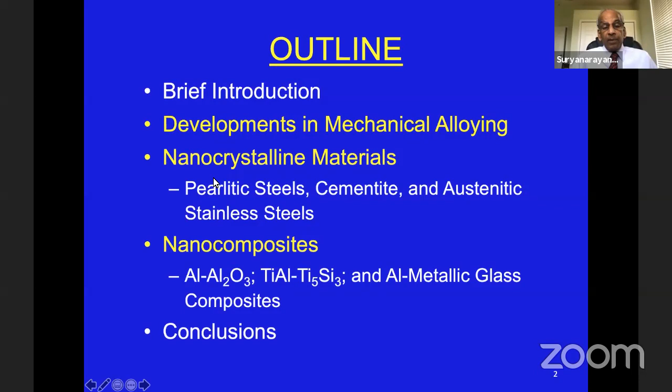The last topic listed in the program was the pathways in phase selection, which I will cover in developments in mechanical alloying itself. Now the first part will basically be the developments in mechanical alloying. And I'm sure most of the people attending this conference know what mechanical alloying is.

But I would like to define mechanical alloying as a powder processing technique that involves repeated cold welding, fracturing, and rewelding of powder particles in a high energy ball mill. That means basically we use a high energy ball mill, and when we put the powders and the grinding media together, the repeated operations of cold welding, fracturing, and rewelding eventually form an alloy. And because this is done under a mechanical force, this is called mechanical alloying.

The potential of this technique of mechanical alloying—from now onwards I would like to abbreviate this as MA, mechanical alloying—you can synthesize a variety of alloys, and all this synthesis takes place at very low temperatures, in fact most of the time at room temperature, whereas traditional alloying requires melting, which requires very high temperatures, and there's no such requirement here.

You can also choose what constitution, that means what type of phases do you want? Do you want solid solutions, metallic glasses, or intermetallics, quasi-crystalline, nanocrystalline? You can choose. That's where the pathways to phase selection also comes in. Sometimes, because of the difficulty in melting and alloying together in the liquid state, metals that are difficult to alloy can also be combined using MA.

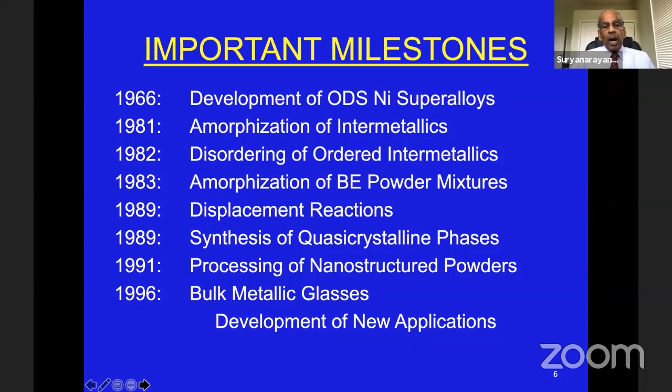There are many applications already existing, but more and more are coming up in the years to come.

Another technique that was very popular around the same time was called RSP, Rapid Solidification Processing. Mechanical alloying and RSP are both non-equilibrium processing methods, meaning that by subjecting materials to either process, you produce a variety of metastable phases and can change the microstructural conditions—instead of crystalline, you can make it amorphous, nanocrystalline, quasi-crystalline, or many other combinations.

The attributes of both RSP and MA are very similar, but an important difference is that RSP requires the alloy to be melted and then solidified very rapidly—that's why it's called rapid solidification processing. If solidification is involved, the phase diagrams determine what type of phases are produced. Although metastable phases are produced which aren't part of the phase diagrams, the phase diagram still imposes some restrictions on the type of phases that could be produced.

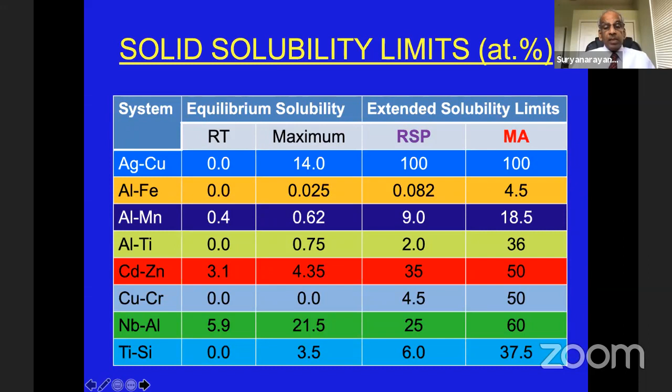Now, if you plot the atomic radius on the y-axis against the solute content, looking at copper as the solvent, plus or minus 15% are the limits suggested by Hume-Rothery. This is plus 15% of the atomic size, and this is minus 15% of the atomic size.

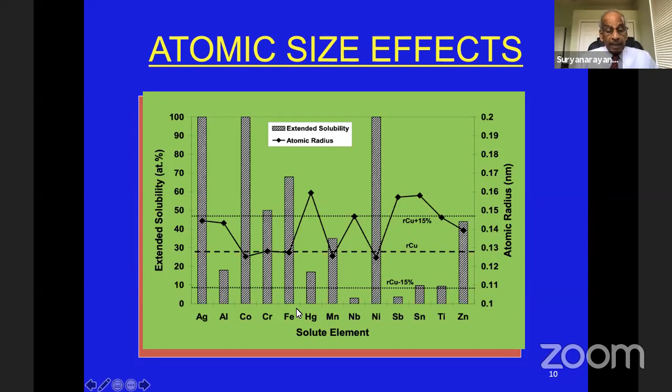That's the reason why, if you want to determine what factors are responsible for determining the grain size, there are two things: one is defect creation. If you create more defects, it's possible to decrease the grain size. But recovery also takes place because of heat effects, and therefore the grain size increases. The balance between defect creation and recovery determines what the final grain size is.

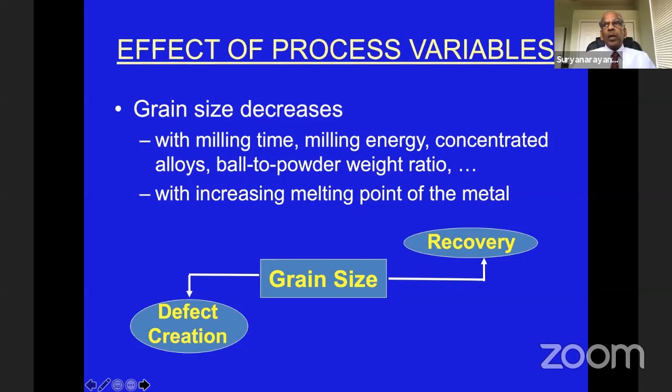To put it very succinctly, the grain size decreases with increasing milling time, with increasing milling energy, with increasing solute concentration, with high ball-to-powder weight ratio, and with increasing melting point of the metal. So you can determine what are the more important factors for your investigation.

Metallic glasses are also formed by these techniques, both RSP and MA. Just like in the solid solution cases, by mechanical alloying you're able to increase the glass forming composition ranges - more than what is possible by rapid solidification processes. It's a very similar technique, but essentially MA seems to be more effective, because the amount of departure you can achieve by mechanical alloying is more than what is possible by RSP methods.

Now, these nanocrystalline materials sometimes become very difficult to consolidate, and this is the way you can think of a consolidation rate or densification rate equation, where there are two very important things: one is the bulk diffusivity, and the second is the grain size.

This represents the densification rate. So if D decreases, the densification rate increases, or if the diffusivity of either the volume or the grain boundary increase, this densification rate also increases.

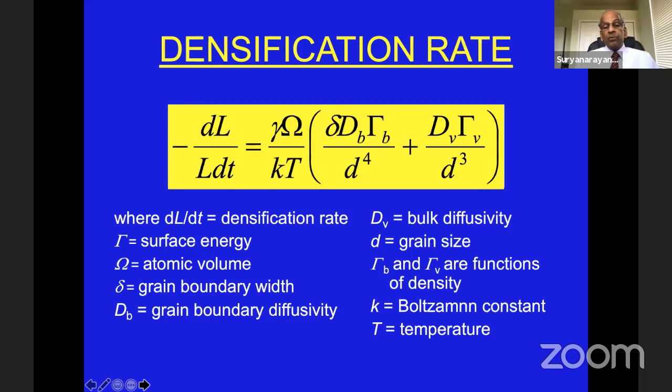But in the case of nanocrystalline materials, the diffusivity is higher, the grain size is smaller. As a result of this combination, the densification or consolidation of nanocrystalline materials is very easy, and that is an advantage for nanocrystalline materials.

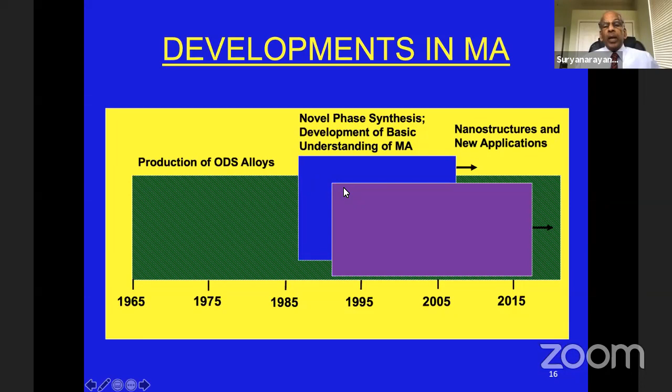To conclude this part of the lecture, the developments in mechanical alloying started in 1966 with the production of oxide dispersion superalloys. But by about 1986, people tried to produce amorphous alloys, solid solutions, or develop the basic understanding of why these processes occur this way, and how you determine the type of phase that is produced. All the scientific basis for understanding mechanical alloying started developing in 1986, and it is still continuing. By 1991, nanostructures were produced, and this is continuing even now, with new applications being generated. These two aspects are continuing, but the ODS alloys, there isn't much going on, which is why I did not put an arrow here.

Now the conclusion of this part: it is a simple and economic materials processing technique. You can determine what phase you want and what phase proportions by optimizing the process parameters. Powder contamination could be an issue, but that can be minimized or completely avoided at some cost. You can design, synthesize, and produce a variety of advanced materials using this technique of mechanical alloying.

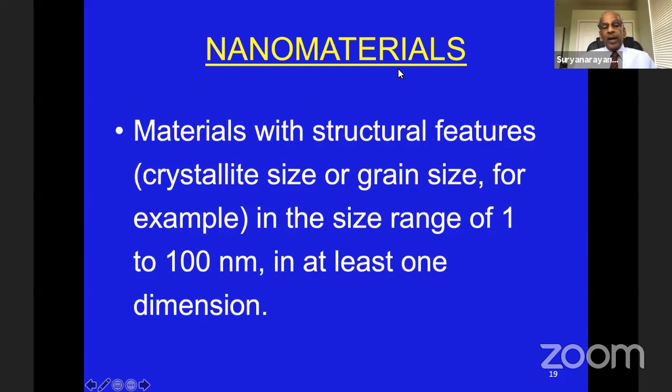Now I'm going to talk about nanocrystalline materials. This is something a lot of people know, probably everybody knows. A grain size of 1 to 100 nanometers will qualify a material to be called a nanomaterial.

But this nanomaterial is not really very new. People talk about the so-called Lycurgus cup, which is residing in the British Museum now, made with glass, done around the 4th century. You can see, if you put light outside this cup, that means in reflection, the glass color will be green. But if you put light inside the cup, that means you look at the transmission, then it turns red. The reason appears to be that when these cups were made, there were very small gold particles, approximately 70 nanometers in size.

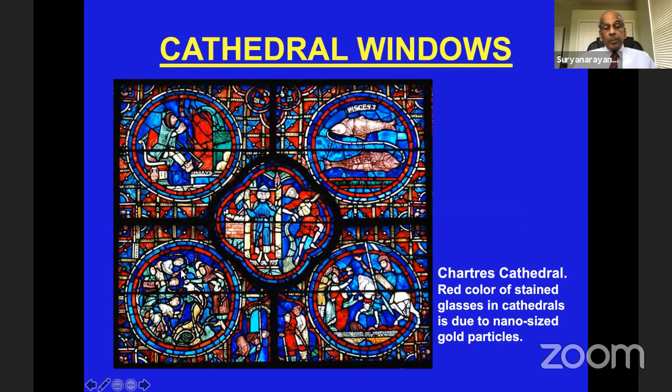Because of these small gold particles, the optical properties are different, both in reflection and in transmission. You can also see this in cathedrals in most parts of the world, again because of the nano-sized gold particles present in the glasses produced for these applications.

You can have new and improved properties and functionalities. Materials with grain size less than 30 nanometers behave completely differently, and therefore people feel there is unlimited potential for applications of these nanomaterials. You can have all these property changes as a function of the grain size.

If you take nanocrystalline materials, you can increase the ductility and toughness, but at the same time, you can also increase strength and hardness. Typically, in a coarse grained material, if strength is high, ductility is low, but in nanocrystalline materials, you can achieve both of them.

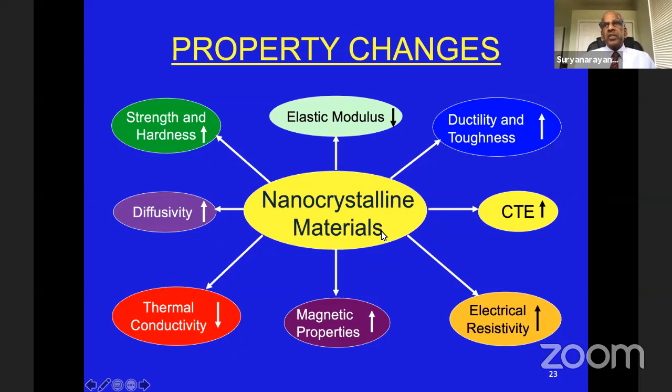Diffusivity is high, thermal conductivity is low, electrical resistivity is higher, magnetic properties are improved, coefficient of thermal expansion is higher, and modulus of elasticity decreases. Because of this interesting combination, a lot of new applications are being developed.

With this as the background, I would like to talk about nanostructured steels, focusing on three different aspects. One is the so-called pearlitic steels, that is iron containing about 0.8 weight% carbon. The second is pure cementite, iron containing 6.67 weight% carbon. The third is austenitic stainless steels, the so-called 18-8 stainless steels, iron with 18% chromium and typically 8% nickel. We wanted to see the effect of nickel content on the formation of these austenitic stainless steels in the mechanical alloying process.

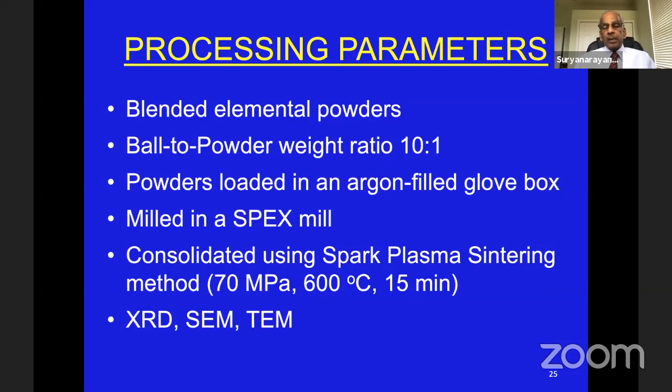All these are developed only during mechanical alloying, and my talk will cover only mechanical alloying, not the others. These are the process parameters. We started with a SPEX mill, using a very low ball to powder ratio, and then consolidated these materials using spark plasma sintering at a relatively low temperature of 600 degrees C, for just 15 minutes, using a relatively low pressure of 70 megapascals. But we were able to get complete densification.

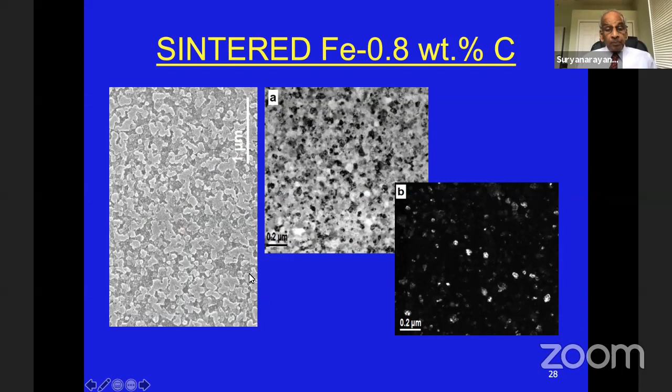The micron marker is 0.2 micron. This is only about less than 50 nanometers, even after consolidation. Now, if you look at the microstructure after annealing, that is after spark plasma sintering followed by annealing at 900 degrees for 1 hour, you still have the same phases, although the proportions are slightly different, but essentially the same two phases continue even after annealing.

Now you see the lamellar structure, the eutectoid lamellar structure, very clearly after annealing, because the very fine grain sizes would preclude the formation of this type of lamellar microstructure. That's the reason why only after annealing can you see this clearly in these TEM, transmission electron micrographs.

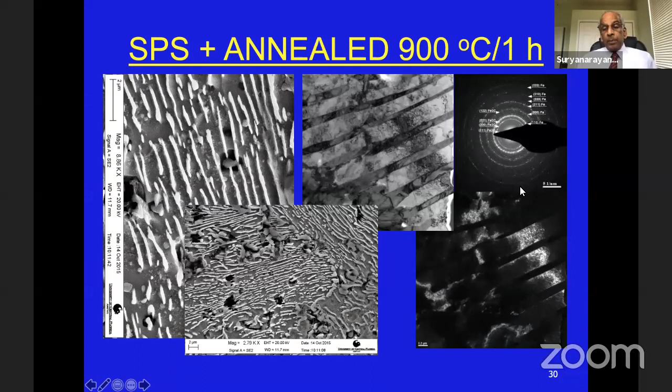These are the scanning electron micrographs. You can see the ferrite, cementite, ferrite, cementite, alternating lamellae, and then the diffraction pattern. If you look at the dark field picture, the white, highlighted portions represent the ferrite, because this is taken from one of the ferrite reflections. So you can produce these structures very uniformly using our technique.

Like that, there is variation - in other words, the uniform distribution of the two phases is not there, and therefore the properties also are not going to be uniform. But by our processing, by adjusting the process parameters, we're able to take care of all of these things.

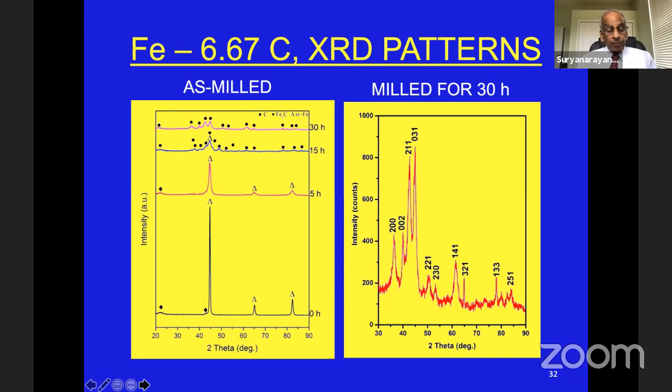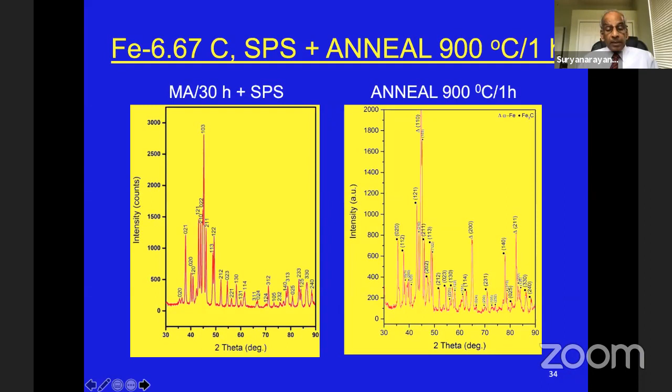But after SPS, if you anneal it also, again like in the previous case, you can get very sharp peaks. Because this is annealed at 900 degrees Celsius, some amount of alpha ferrite has also formed in this particular case. If you look at the microstructure, you will see the distribution of grains, which are larger than in the previous case, but the diffraction pattern indicates ferrite and cementite both present, though the amount of ferrite is relatively small in proportion.

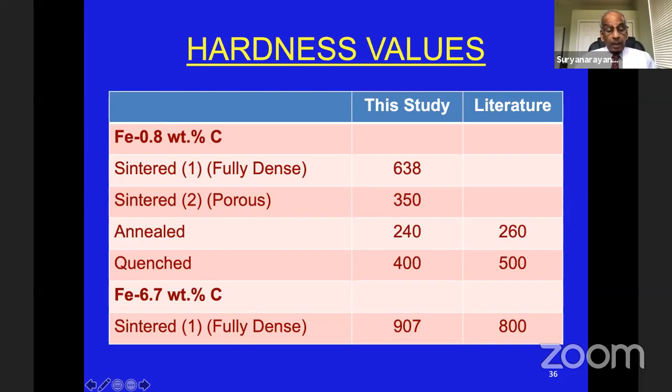I can measure the hardness values, and when I measure them, if it is fully dense, the perlitic steel has a hardness of 638 Vickers. And if it is cementite, 900 Vickers hardness number. By annealing and quenching, you can adjust the properties very easily. If you look at the hardness indentation of the cementite, you can see all these cracks indicating that the material is relatively brittle.

Now, if you look at the austenitic stainless steels, as I said, typically you see 18 chromium and 8 nickel. But we wanted to study the effect of nickel content.

If you look at the material milled for 30 hours, you can now see the 18-8, that means 18 chrome, 8 nickel - you can see both gamma and some alpha, that means the austenite phase plus some ferrite. Increase the nickel content to 12%, the amount of ferrite has decreased. Increase the nickel content to 20%, there is no ferrite present at all, pure austenite.

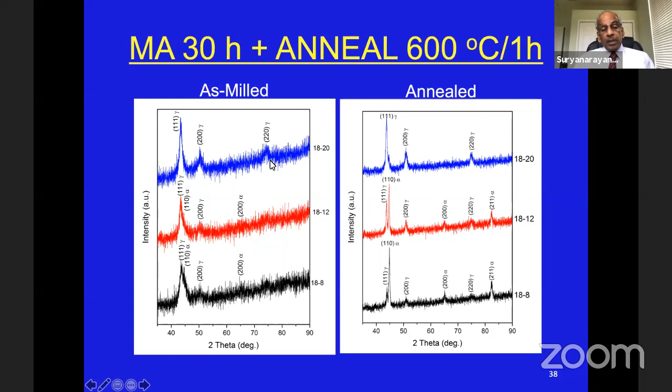Now, if we anneal this, obviously the patterns are going to be much more clear. Here again, you will see even after annealing you still have some ferrite in both 12 and 8% nickel, but at 20% nickel, obviously, because there is no ferrite here, here also you do not see any ferrite present at all.

So what we did was look at the electron microscopy results. You look at the grain size - this is 50 nanometers, and this is obviously less than about 10 nanometers. When you go to a higher resolution, you can find out what the actual situation is.

The diffraction patterns are different in different regions, and what you would notice is the presence of both alpha and gamma, that means ferrite and austenite. The same thing is seen in just one general area. But if you choose any one particular area and use this microbeam electron diffraction or nanobeam electron diffraction, you'll be able to get a better picture.

On the other hand, if you go to 20% nickel, everywhere you will see only austenite. That means the X-ray diffraction results are confirmed using this particular type of technique also.

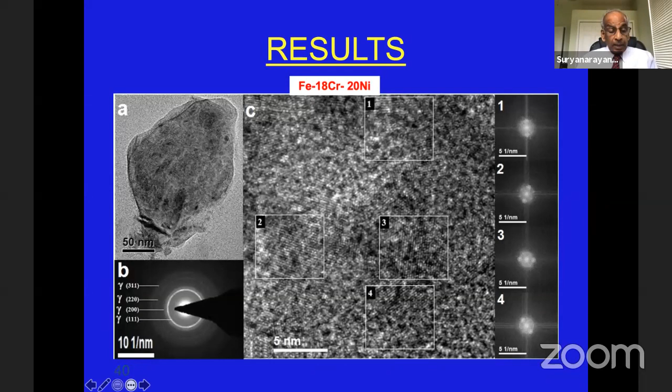So if you look at the constitution, now you will see 8%, 12%, 20% nickel - the amount of alpha and gamma is different, and the amount of gamma is increasing after annealing, although ferrite is still continuing to be present.

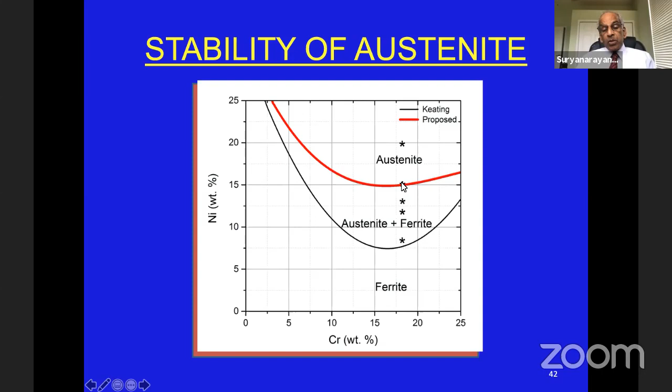Now I would like to focus on nanocomposites. This is the last part of my presentation.

Typically, when you have a particular reinforcement, that means in a composite, you have a matrix and a reinforcement. Depending upon the size of the reinforcement, the distance between two particles is going to be different. The larger the particle size, the larger is the spacing between particles.

Typically, when you do a very traditional composite, you can produce composites with a large volume fraction of reinforcement, maybe 30% or 50%. This is easy. But if you go to very small size reinforcement, 10 nanometers to 100 nanometers in that range, you can typically put only 2 to 5% of the reinforcement. More than that is difficult to mix thoroughly. But our goal is, can we increase it? Can we push this to 30% or 50%?

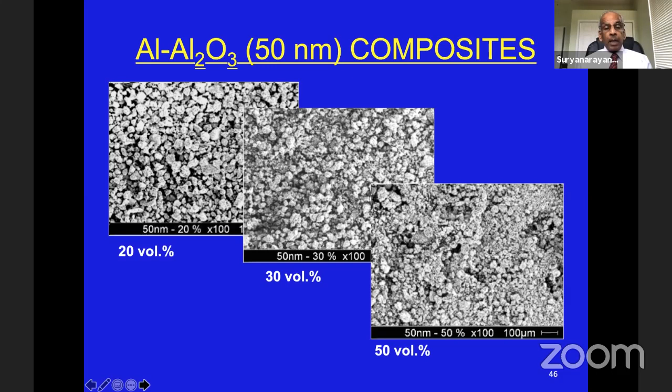So what we started with was the alumina system. The alumina particles are 50 nanometers. We said, let's take 20%, 30%, or 50% by volume of alumina and see whether we can distribute it uniformly by mechanical alloying. What we see is you can produce very uniform distribution of alumina in the aluminum matrix by increasing the milling time to approximately 20 to 24 hours. This is confirmed by EDS mapping technique, and I'm not going to show all those details here.

But what we would like to know is, how is the load bearing capacity of this particular material? So what we did was subject this material to neutron diffraction. When we subject it to neutron diffraction, you can record the neutron diffraction pattern, and at the same time, you can also apply a load.

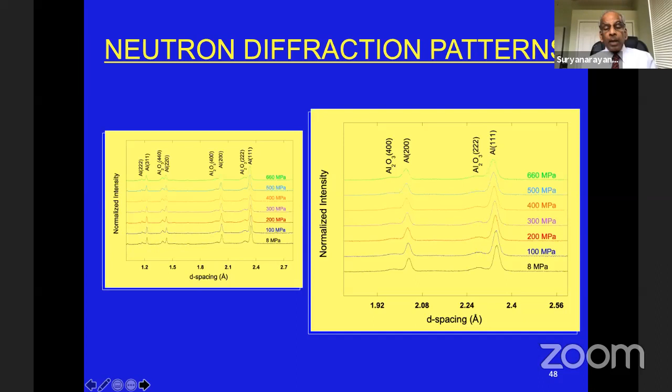So if you take any one particular peak and follow what the position of this peak is, that means the change in interplanar spacing as a function of stress, the change in interplanar spacing can be converted into the strain in the material, and you also know what the actual stress is. You can get a stress strain plot, and once you get that, you'll be able to determine the modulus of elasticity.

The second type of composite I would like to talk about is titanium aluminide containing 60 volume percent titanium silicide. This is a very high volume fraction of reinforcement in a titanium aluminide.

The reason we wanted to check this was titanium aluminide can be superplastically formed around 1300 degrees Celsius. But is it possible that we can reduce that temperature to lower values by having nanocrystalline or ultra fine grain size? So we took mixtures of titanium 48.9 aluminum, titanium 37.5 atom percent silicon, but we add extra silicon to produce this particular composition, which corresponds to 60 volume percent of the titanium silicide and 40 volume percent of the titanium aluminide. That means this is basically a titanium silicide based composite containing titanium aluminide.

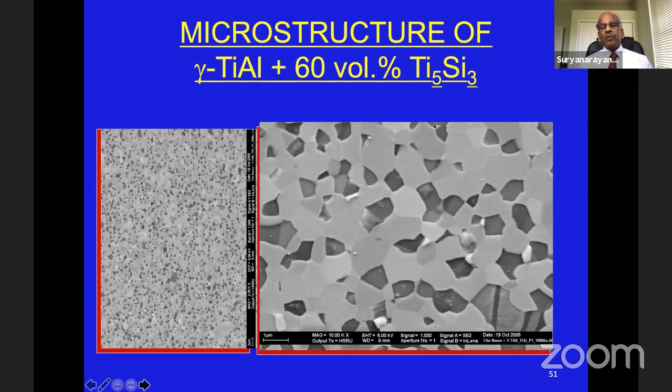Now, if you look at this, the microstructure is very, very fine. You can see both the titanium silicide and titanium aluminide are present. In the gamma titanium aluminide, you can see twinning present. The presence of these twins indicates that these are the titanium aluminide grains and the others are the titanium silicide grains. So it's like a very small grain size of both the matrix and the reinforcement, and both of them are uniformly distributed. This is the type of microstructure which is conducive to formation of superplasticity.

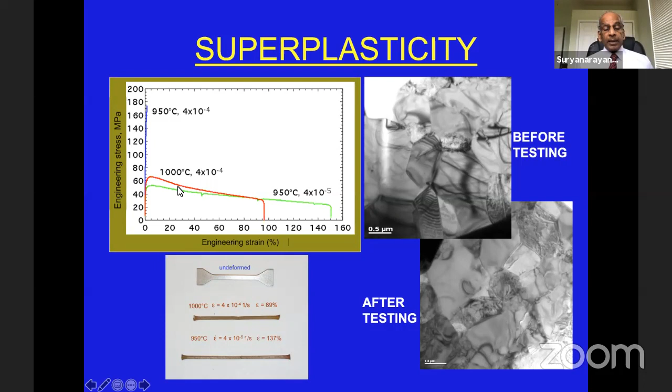And that's confirming that we are able to achieve superplasticity in this composite at a low temperature of 950 degrees at low strain rate. Or if you go to 1000, even at a higher strain rate, you'll be able to achieve this. Conventional coarse-grained materials will be having only this deformation occurring like this at 1300 degrees Celsius, which is too high.

Now, I wanted to talk about the last type of composite, which is very new, and that's the reason why I thought it's interesting to talk about it. So far, we talked about ceramic materials or intermetallics dispersed in a metallic matrix. But what will happen if I introduce a metallic glassy powder inside a metal?

So we took aluminum 7075 powder, added 0, 2, 6, and 8 volume percent of the titanium, copper, nickel, aluminum glassy powder, mechanically alloyed it, and then cold pressing at room temperature and then hot extrusion. Then you have all these different techniques to characterize this material.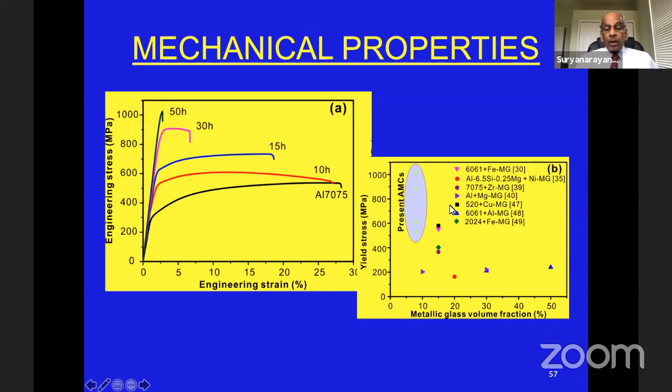And now, if you look at the comparison of the present aluminum matrix composites with the other types of composites, and if you plot yield stress versus metallic glass volume fraction, you're able to get a very high yield strength, even at a low volume fraction. Obviously, if you increase the volume fraction, this is going to be somewhere here even. And therefore, we have achieved the goal of increasing the strength.

But if you now come to 350 degrees Celsius, for example, the aluminum 70-75 is on the top. That means it has a higher strength than the composite. And that is something which is interesting. If you plot the ultimate flow stress as a function of the volume fraction of the reinforcement, you can see at different temperatures, there is a reversal that is taking place.

If you plot the stress as a function of temperature, there is a reversal taking place around 150 to 175 degrees Celsius. This is interesting because a composite is weaker than a monolithic material at higher temperatures.

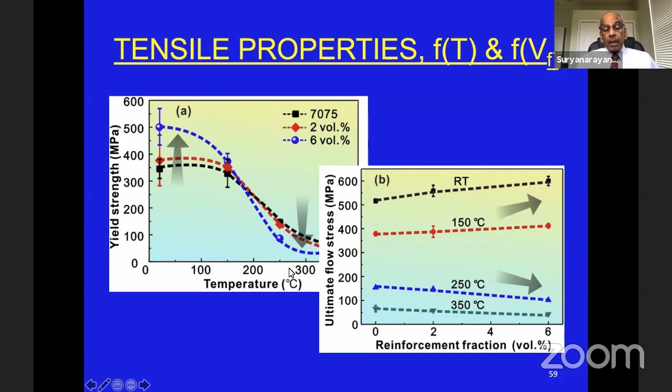So we looked at the possible reasons. Many different possible reasons are there. Thermal softening could be there, or damage accumulation could be there, or large reinforcements or medium-sized reinforcements. All these possibilities exist, but none of them seems to be present.

The more important thing, why we were able to get this particular situation, is because overaging of the matrix takes place, since aluminum 7075 is an age hardenable alloy. Overaging takes place because there is a lot of difference between the coefficient of thermal expansion of the reinforcement and the matrix, and that causes stresses. Those stresses cause generation of dislocations, which act as heterogeneous nucleation sites for the formation of a precipitate, and that accelerates the process, and that's why it is responsible.

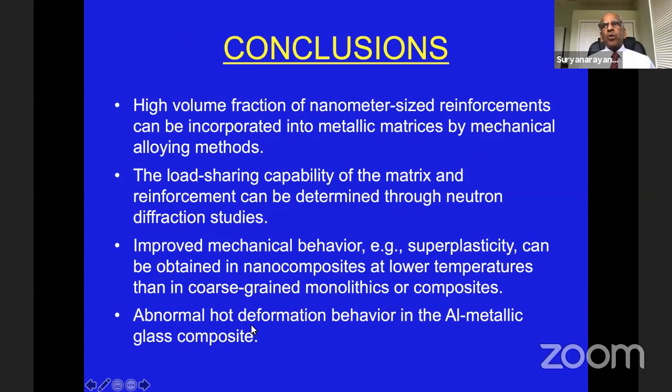So to conclude this nanocomposites area and high volume fraction composites in general, as I said, up to 60% we were able to achieve. The load sharing capability was determined using neutron diffraction studies. Mechanical behavior is in general improved. Superplasticity is observed, and very abnormal behavior, where the matrix seems stronger than the composite, is observed in some of these types of composites.

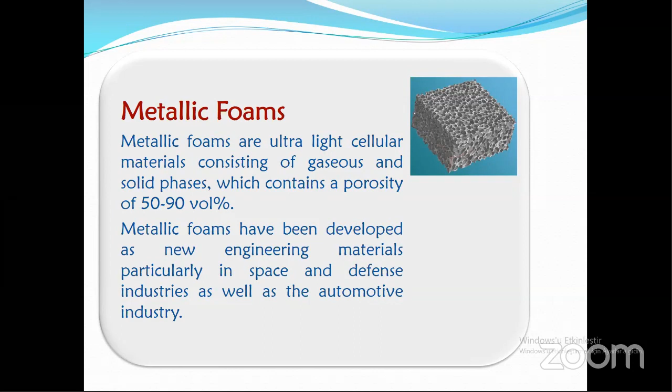Metallic foams have been developed as new engineering materials, particularly in space and defense industry, as well as automotive industry. These ultralight materials possess unique mechanical properties, such as high compression strength, stiffness, good damping, and high fire resistance properties, remarkable vibration attenuation, and high impact energy absorption at low weight.

Much attention is paid to controlling the morphology of the cell during the foaming process of the melt. Actually, there are lots of parameters that can be changed: foaming temperature, that is important, alloying elements, foaming duration, that's also one of the most important things. Another is the amount of reinforcing element. Now we will work on this today.

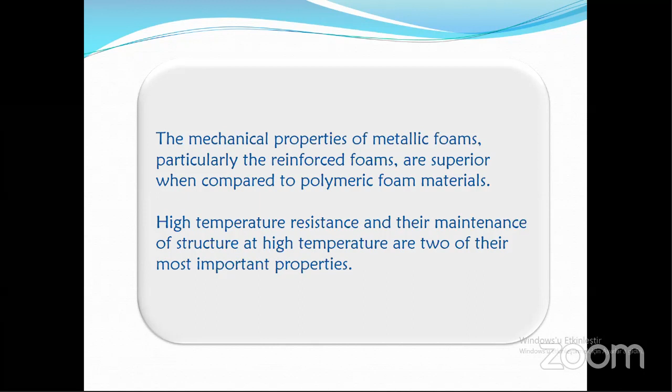The mechanical properties of metallic foams, particularly reinforced foams, are superior when compared to polymeric foam materials. High temperature resistance and their maintenance of structure at high temperature are two of their most important properties. There are two types of pore morphology, open and closed. We are dealing with closed pore morphology.

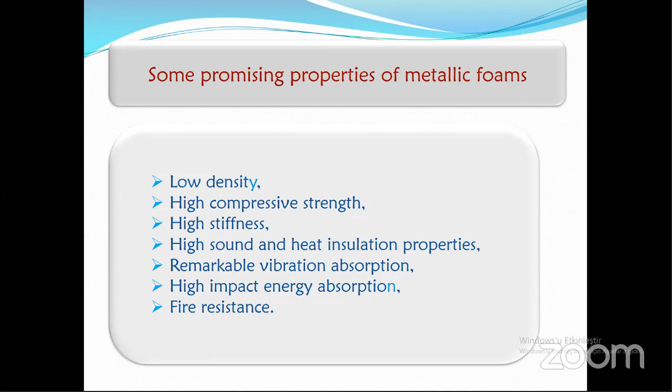Some promising properties of metallic foams are low density, which makes this material popular, and high compressive strength, another important property. High strength, high stiffness, high sound and heat insulation properties, remarkable vibration absorption, high impact energy absorption. Because of these properties, we are working on this material as an armor material. Fire resistance is also another important property of metallic foams.

Excellent properties make foam particularly attractive for the automotive industry. Some leading automotive companies are working hard to use metallic foams in appropriate parts of their vehicles, lifting and conveying systems, transport, ships, and aerospace applications, sound and heat barriers, and internal armor plates.

Actually, this is a new subject. I'm sure that we are one of the first scientists working on this subject.

The study of metallic foams, particularly aluminum ones, has become attractive to researchers interested in both scientific and industrial applications for more than a decade. Experimental studies have shown that almost all metals can be turned into foam. Aluminum, zinc, tin, lead, iron, nickel, brass, and their alloys can be produced by the powder metallurgy route. Nowadays, we are working with copper and even with gold.

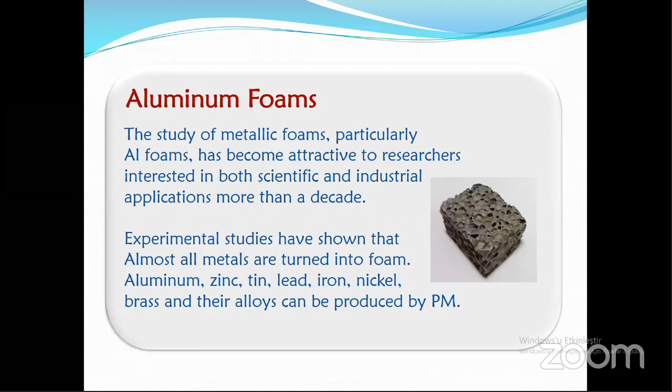When we look at the powder metallurgy route, the production of aluminum foams via this route is attractive due to the ability to produce near net shape components. This method involves mixing aluminum or aluminum alloy powder with a foaming agent, generally titanium hydride, and reinforcing elements such as silicon carbide, boron carbide, aluminum oxide, etc., followed by compaction such as hot pressing, cold pressing, extrusion, or combined methods.

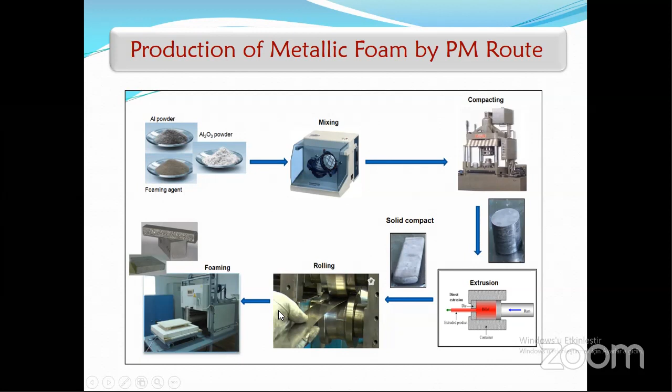Say we are producing aluminum powder, foaming agent, and some reinforcing elements such as alumina. We are mixing them, generally using a three-dimensional turbulent mixer, and then compacting to get green dense material. Since it contains lots of porosity and cracks, it is impossible to form them directly. That's why we are hot extruding that material to obtain a solid compact, then rolling, then foaming in a special furnace, and then we get the metallic foam.

Sometimes we are using a reinforcing element. In order to improve the stability of metallic foams, ceramic particles, mostly silica, alumina, or boron carbide, are commonly added. These ceramic particles are believed to inhibit melt flow by increasing the bulk viscosity, thereby decreasing the rate of cell coarsening and drainage of liquid throughout the cell structure. During the foaming process, these particles attach to the gas-liquid interface and modify its curvature, reducing the pressure difference between the Plateau border and the cell wall.

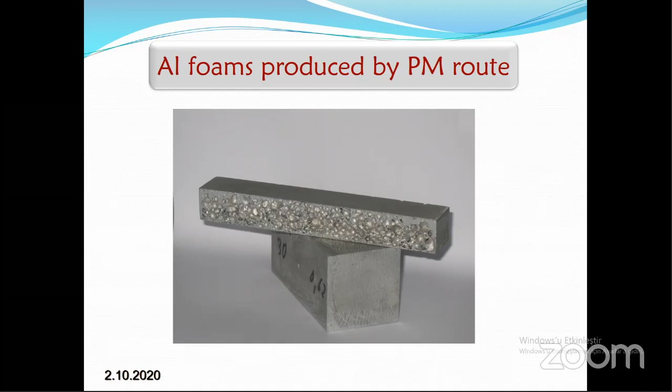These are aluminum foams produced by the powder metallurgy route. When you look at it from the outside, it looks like normal aluminum, but when you cut it, the cross-sectional area contains lots of porosity. It looks like a sponge. Because of this porous structure, it has very low density. That is important. This is the sample produced in our lab.

The density was about 0.6 gram per centimeter cube. A sample can float in water easily. That's why this material is very important.

When we look at the mechanical properties of samples, this is the tensile behavior of foam material and bulk material. Tensile properties of the foam material are not good because of lots of porosity in the sample, which acts as a notch effect. That's why it reduces the tensile properties of the samples. But the compressive strength of the sample is quite good.

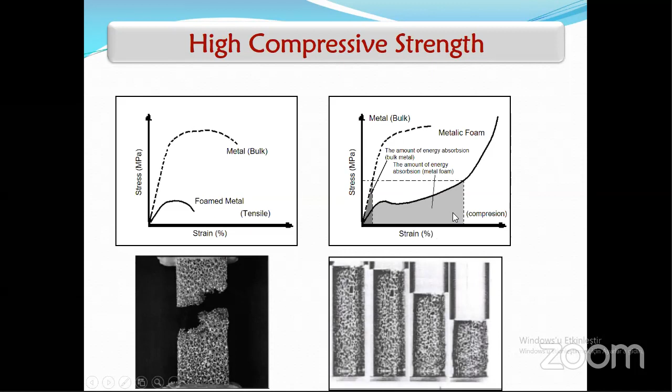That graph shows the bulk material compressive strength, that is, the metallic foam. The dark area here is the amount of energy absorption of the bulk material, which is the small area. This open gray, that big area, is the amount of energy absorption of the metallic foam. So we can say that the compressive strength of these materials is quite good.

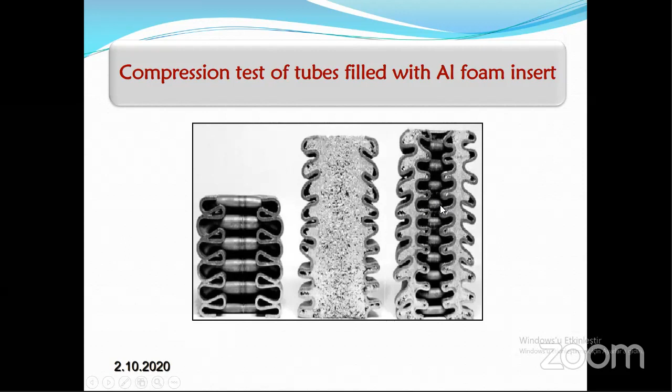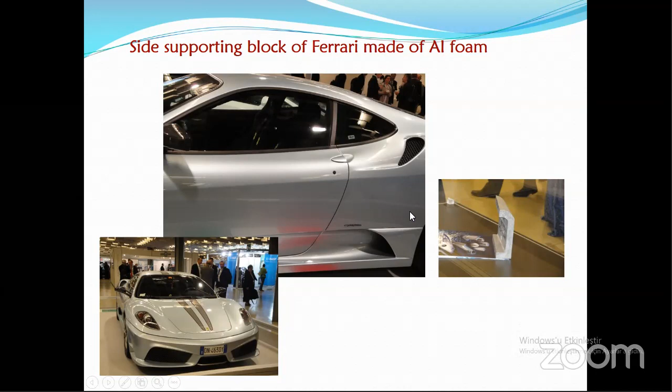This picture shows the possible usage of metallic foams for automotive frames. We can use metallic foam in some parts of this frame. Some leading car companies are working to support some parts of cars with aluminum or magnesium foams. This is the side supporting block of a Ferrari made of aluminum foam, shown on the right-hand side here. The aluminum foam is supported somewhere here. This was shown at a conference in Italy where I saw this Ferrari displayed.

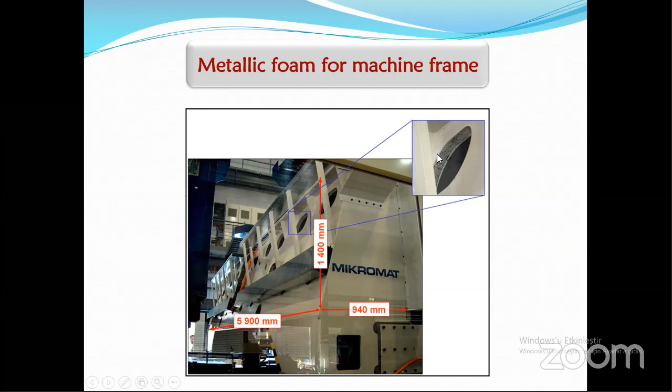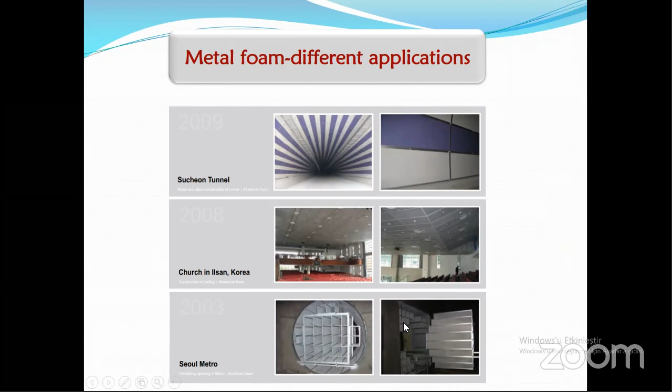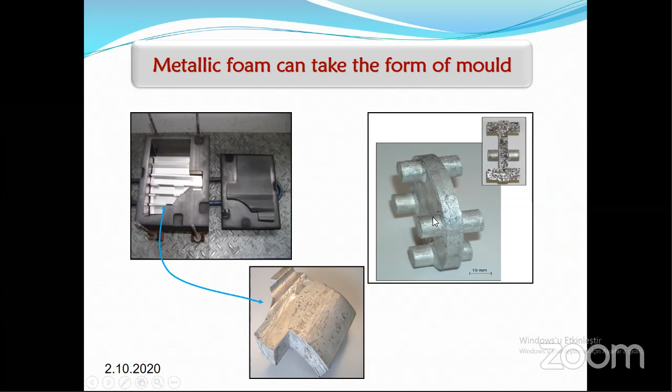How can we produce it? There are a number of production methods. This is the production of metallic foam from small precursor materials. We don't use these precursors so much, but this is just to show how metallic foam comes out, and this video is very good. When you heat the precursor foamable material, it starts foaming, and then sometimes you have to take it out. If you want to control the structure or the mechanical properties, you have to put a limiting plate somewhere here.

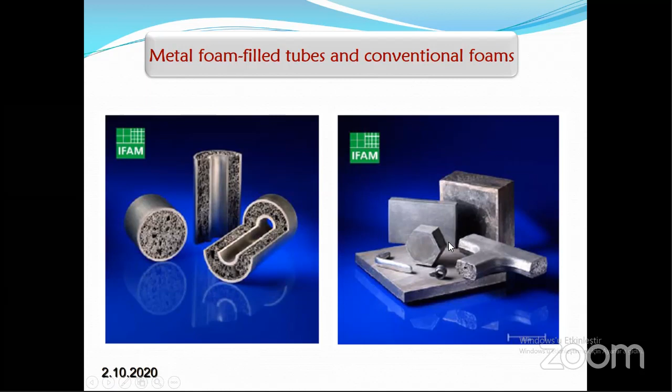This shows metal foam filled tubes, which are conventional foams produced at IFAM, the Fraunhofer Institute in Bremen. Sandwich foam and other types of metallic foam have the outside made of non-foamable materials, with foam inside.

A sandwich panel consisting of a metal foam core and two metal face sheets can be easily obtained by bonding the face sheet to a piece of foam with adhesive. Alternatively, foamable raw materials can be roll-cladded with metals, such as steel, aluminum, or titanium, by attaching each side to the foamable precursor before rolling. We are doing that one actually.

The conventional non-foamable layers need to have a significantly higher solidus temperature to avoid melting during foaming expansion, otherwise the cover layer also melts. This is the production of sandwich foam.

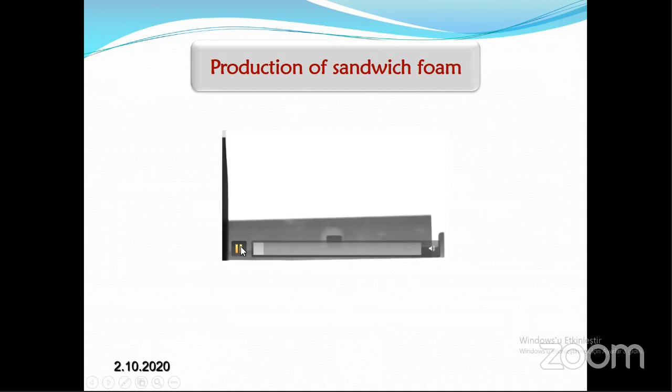That's also a good video. In both sides of the sandwich there is non-foamable metal, and the inside core is foamable material. When you heat it up, the foamable material starts foaming. Look, the outside stays intact, so you can stop whenever you want. If you want, you can go a little bit more and get sandwich foams. Both sides are non-foamable materials, and inside is the foamable precursor material.

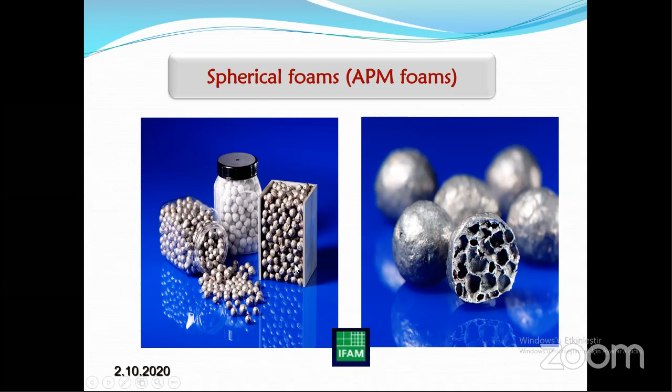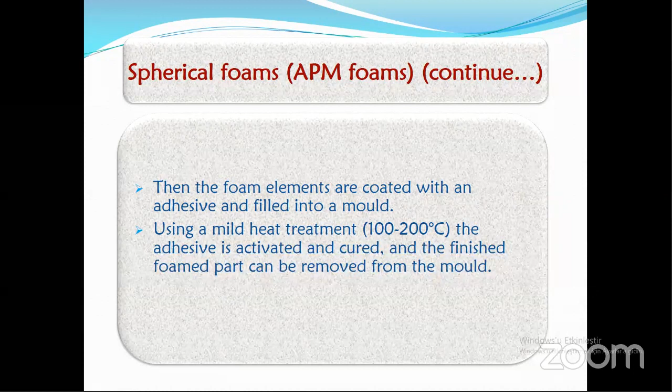Spherical foams, now called advanced pore morphology, are new. This process, a recent development of Fraunhofer IFAM in Bremen, uses a large number of granules made of a foamable precursor material. Generally, sheet materials are cut into rectangular shapes and continuously fed through a belt furnace to effect foaming. During foaming, they take spherical forms due to the surface tension of the materials. Then the foam elements are coated with an adhesive and filled into a mold. Using a mild heat treatment, the adhesive is activated and cured, and then the finished foam parts can be removed from the mold.

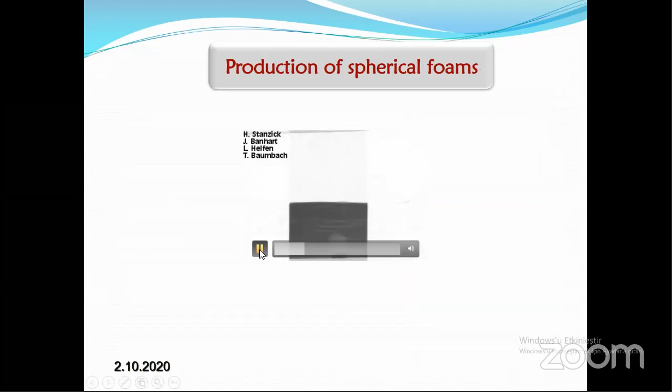You are cutting a rectangular shape foamable precursor. Because of surface tension, it turns into a spherical shape. If you have a very big material, the bottom side is a little bit flat, but nowadays we prepare a special mold for this, so we can get very nice, very spherical samples.

I will show some materials and experimental procedure about that. We work a lot actually, but I will give some information. We use aluminum powder and Alumix 231 powders from ECKA. For blowing agent, we use titanium hydride from Aldrich. For reinforcing elements, silicon carbide from Aldrich and boron carbide from Nurol, Turkey.

Compaction was 600 megapascal. Preheat treatment 550. Deformation rate 50 to 70%. Foaming temperature 690 to 710 centigrade.

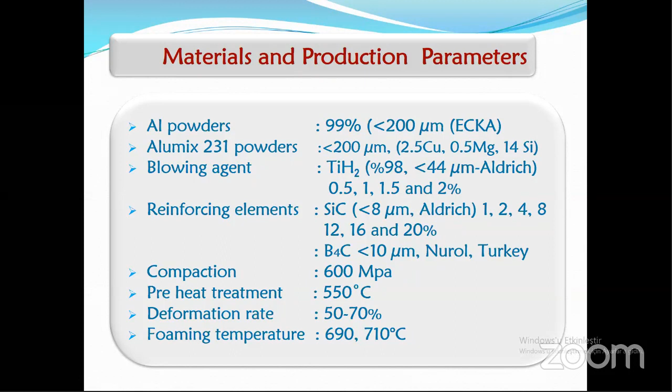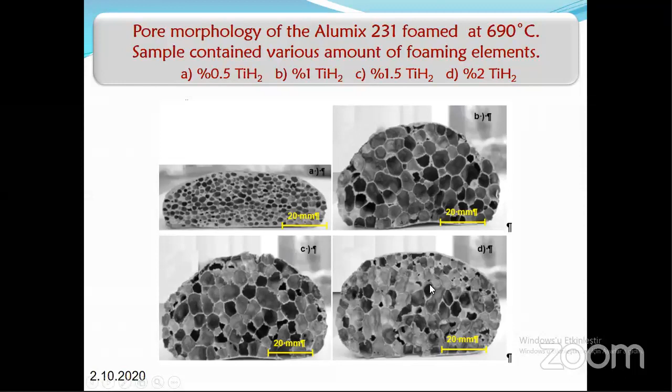When you go further, density is decreasing, but the mechanical properties also decrease.

This is pore morphology of Alumix 231 foam at 690. Again, samples contain various amounts of foaming elements: 0.5% titanium hydride, 1%, then 1.5% and 2%. Because of high temperature and high amount of foaming elements, some collapsing happened, and we took these samples out - they cannot be used.

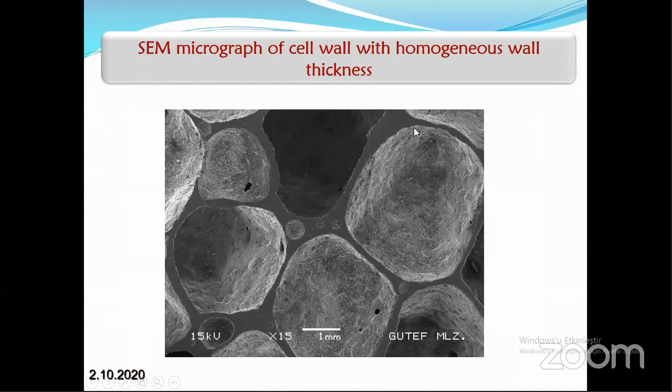Looking at the effect of foaming agent on the linear expansion rate of aluminum-based foam at 710: linear expansion rate of pure aluminum is just over 400%. But Alumix 231 goes almost 400 when they contain 0.5 and 1% titanium hydride, and then starts decreasing.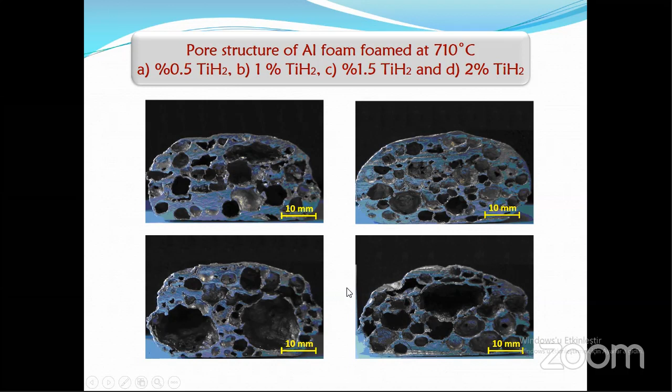This is the pore structure of aluminum foam at 710 with 0.5, 1, 1.5, and 2% reinforcing element. When we compare these materials with LMX231, pore structure is not good, but 0.5 and 1% is reasonable. After that, there's coarsening of the pore, which is why mechanical properties are also not good.

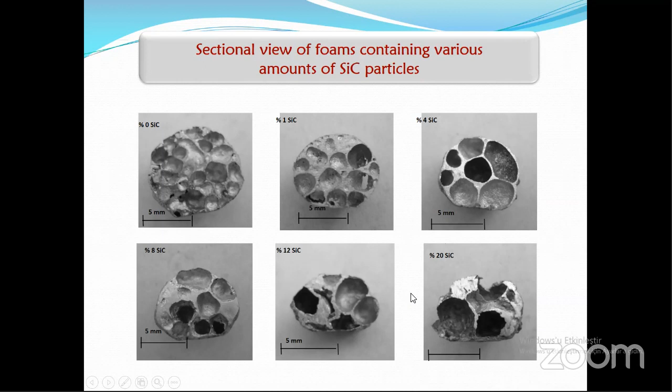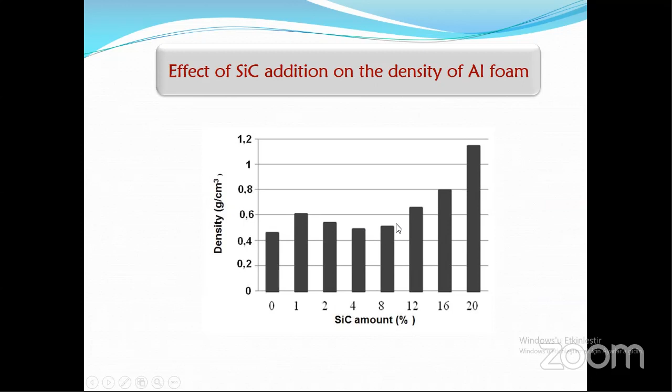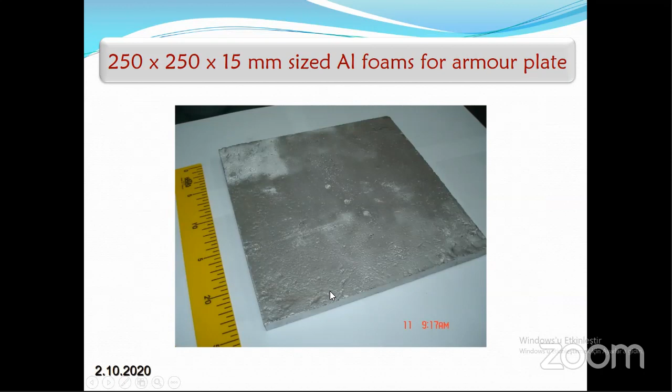This is the sandwich structure, and this is the cross-sectional area of the sandwich structure - that's quite good, actually. This is a very big sample, 250, with a thickness of 15 millimeters size, aluminum foam. This is for armor plate.

Aluminum foam reinforced armor plates, I would like to mention. Boron carbide reinforced aluminum-based metallic foam was produced and then used in sandwich structure of polymer-based armor plate in order to reduce the shock effect during explosion. This research was the desire of Turkish Armed Forces.

All ballistic tests were performed by them according to the relevant NATO STANAG standards. We are allowed to provide only a limited test result. This project was carried out by Gazi University, where I was working at that time. Izmir Institute of Technology and Baris Electric, we worked together.

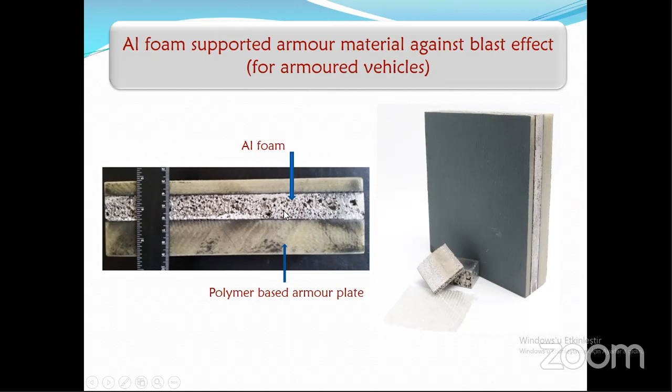Aluminum foam supported armor material against blast effect. This is the polymer-based armor plate normally used in some armored vehicles. Now we add some aluminum foam inside here, and then blast test was carried out on this sample.

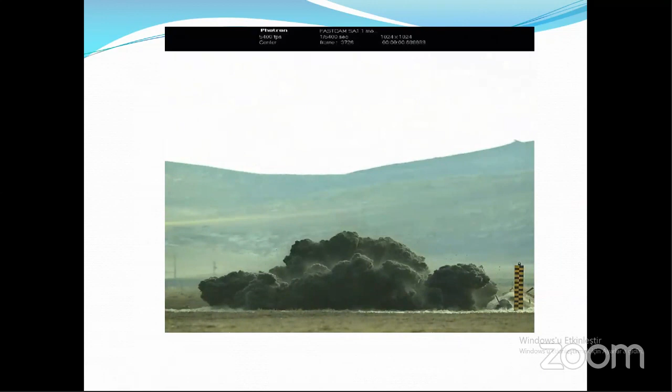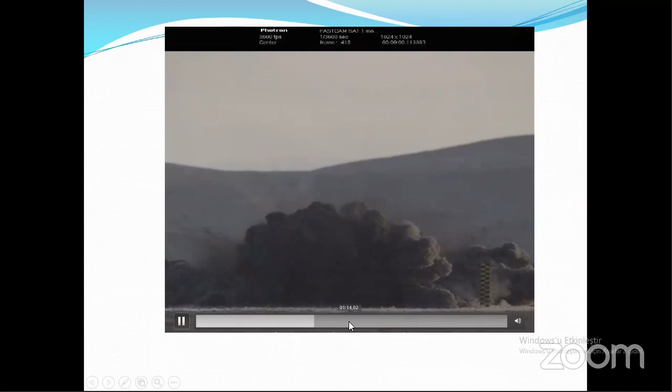This is the 10 kilogram TNT test. And then this group is 8 kilograms TNT. This one is a little bit low.

Now I want to show slow motion blast test of the sample. Several cameras were positioned in different locations, taking pictures and videos during this test.

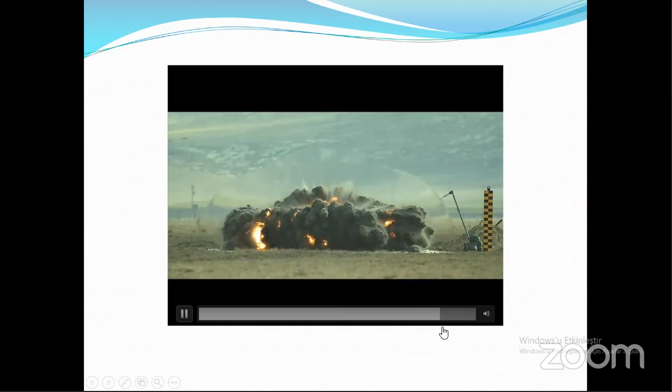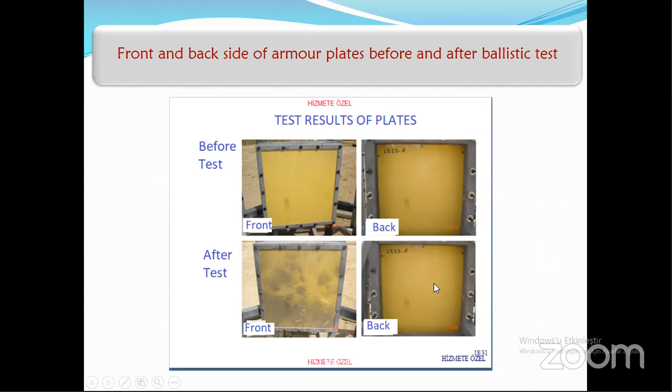Front and back side of armor plates, before and after ballistic test. That is before the test, front and back side of our armor plates. This is after the test - they are intact actually, no problem occurred here. I couldn't give some detailed information about that because I am not allowed.

Just in order to show the energy absorption capacity of aluminum foam, here is a last video taken from the Fraunhofer Institute while I was working there. This is normal metal, this is the metallic foam. Look - the steel ball first falls onto the steel plate. Okay, this is metallic foam, keeping very, very nice.

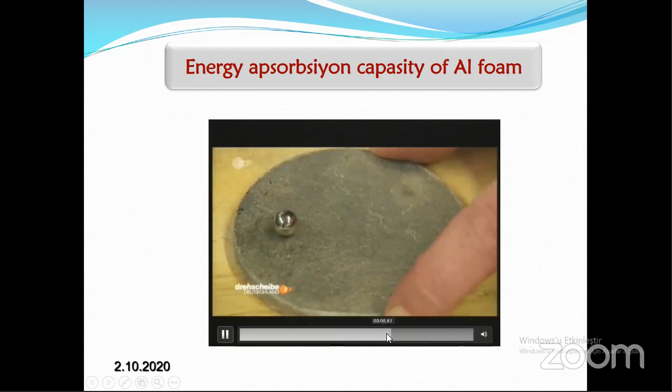As a conclusion, aluminum and Alumix 231 powders were foamed with various amounts of foaming agent at 690 and 710 centigrade degrees, and spherical foams with the addition of silicon carbide and boron carbide particles were formed at 690 degrees, and the test results are given below. The amount of foaming agent was found to be one of the important parameters for foaming, particularly for pore structure, linear expansion rate, and morphology of both pure aluminum and Alumix-231 foams.

1% titanium hydride was found to be the most suitable amount of foaming agent for foaming of both materials. For all conditions, foam produced from Alumix-231 powder exhibited more homogeneous pore structure compared to samples produced from pure aluminum powders. With high amount of foaming agent, results in a thinner cell wall, together with partial agglomeration of pores and finally collapsing of foams.

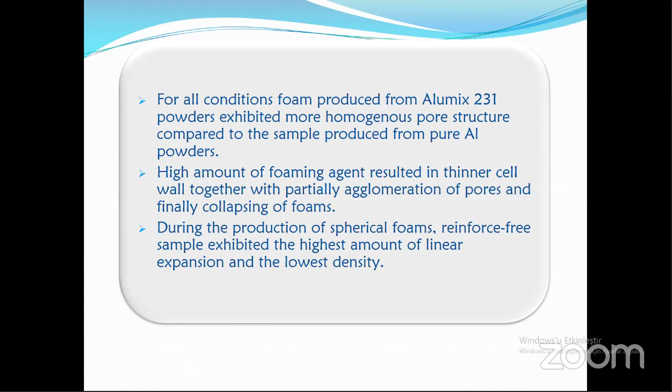During the production of spherical foams, the reinforce-free sample exhibited the highest amount of linear expansion and lowest density. On the spherical foam containing silicon carbide, the best result was obtained on the sample containing 4% silicon carbide particles. This sample exhibited more spherical structure, together with lower density, homogeneous pore structure and higher linear expansion. Samples containing more than 8% silicon carbide did not have a spherical shape, and encountered difficulty forming a homogeneous pore structure. This was attributed to the high amount of reinforcing element, which increased the viscosity of the melt.

I would like to thank TUBITAK for supporting this work, and also I would like to thank the Fraunhofer IFAM Bremen for providing some pictures and videos. Thanks for your attention. If you have any question, I'll be very happy to answer that one.